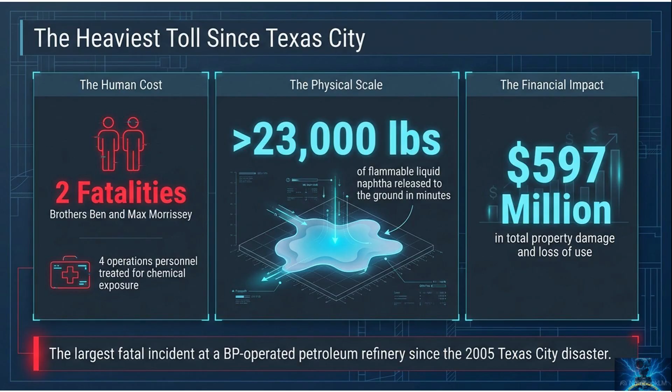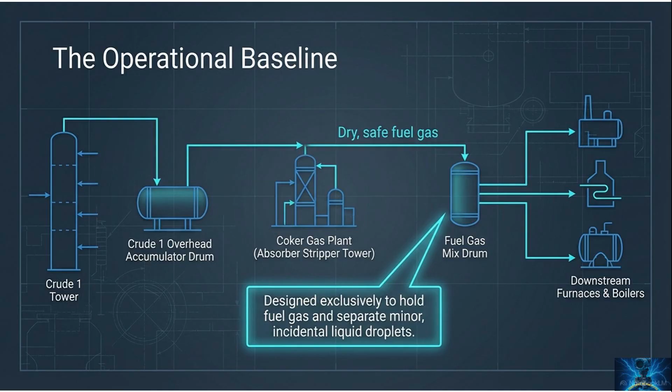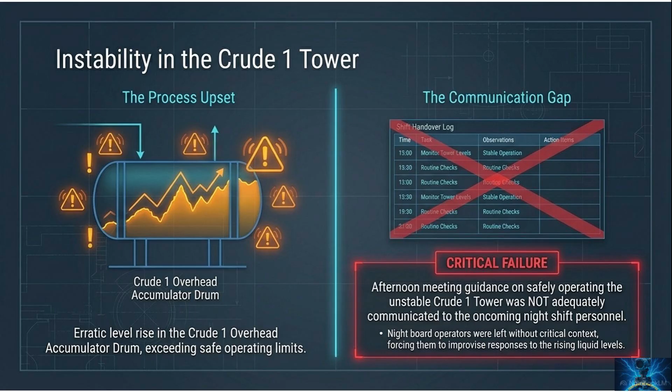The path toward disaster really began with instability in the Crude 1 tower. Earlier problems had already left operations in an abnormal state, and the night shift inherited a unit that was not truly stable. At the same time, critical operating context was not fully communicated during handover. So the incoming operators were trying to manage rising liquid levels and shifting process conditions without the full picture. That is a rotten setup for good decision-making.

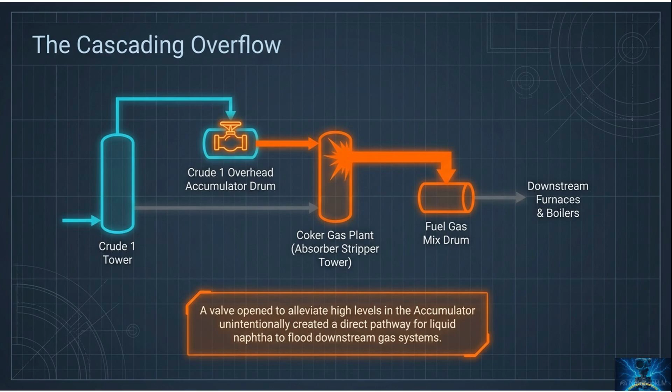Here is where the cascade becomes physical. To relieve high level in the Crude 1 overhead accumulator drum, a valve was opened to send naphtha toward the coker gas plant. But with the coker gas plant in a vulnerable configuration, that action created a direct pathway for liquid naphtha to move where only vapor service was expected. What looked like a local corrective move upstream became the start of a refinery-wide overflow problem downstream.

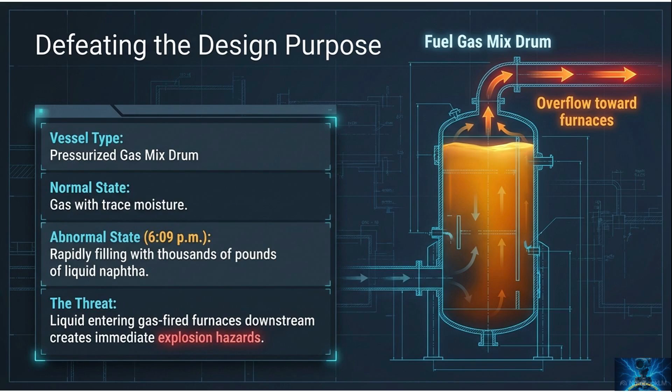About 6:09 p.m., the fuel gas mix drum was no longer acting like a gas separator. It was rapidly filling with liquid naphtha. That completely defeated its design purpose. A gas mix drum can tolerate trace moisture. It cannot safely handle thousands of pounds of flammable liquid pouring into a fuel gas system. Once that happened, the threat changed from a process upset to an immediate ignition hazard involving furnaces and boilers across the unit.

Now pile that on top of an alarm flood. The board operators were not dealing with a clean, manageable panel. They were being hammered by alarms for nearly 12 hours. More than 3,700 alarms were recorded that day. That is not more awareness. That is cognitive overload. When alarms come faster than a human can interpret and prioritize them, the control room stops being a decision center and starts becoming a noise machine.

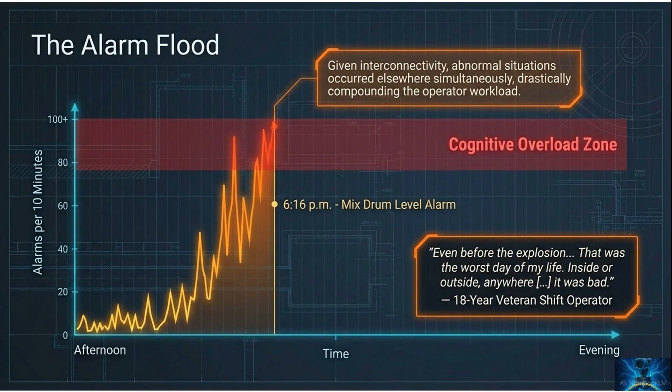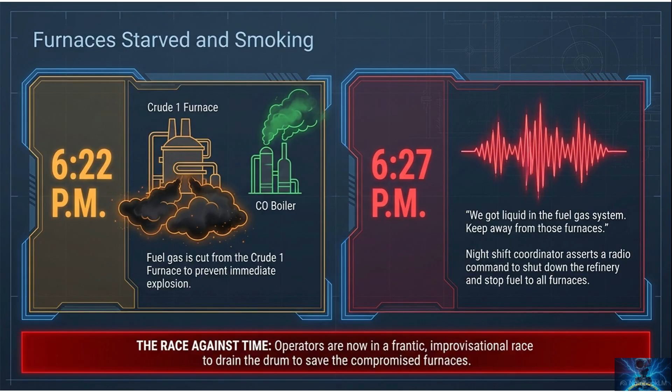The system itself started broadcasting distress signals. Furnaces and boilers began smoking because liquid naphtha was reaching equipment that should have been burning clean fuel gas. The Crude 1 furnace showed black smoke first, then a boiler emitted green smoke, and the warning was unmistakable. Liquid was in the fuel gas system. By 6:27 p.m., the refinery coordinator called for shutdown actions. But by then, the excess liquid had already moved too far downstream.

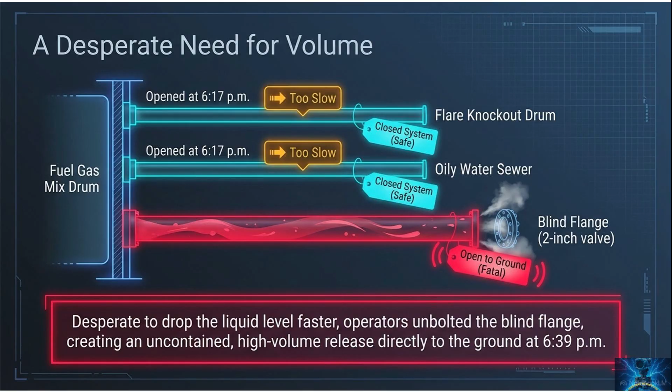At this point, operators needed volume. They opened the drain to the flare knockout drum and the drain to the oily water sewer. But those paths were too slow to keep up with what was entering the mix drum. Under intense pressure, they escalated to a far more dangerous workaround, removing the blind flange and releasing material directly to the ground. That was not a controlled process solution. It was an emergency improvisation inside a failing system.

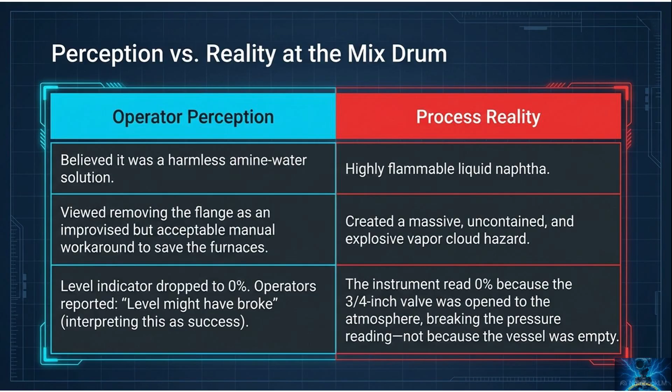The instrument said the drum was emptying, when in reality it was still full and still feeding the hazard. By the mid-6:30s, the situation had crossed into an uncontained release. Operators in SCBA gear were using water hoses to try to direct the draining liquid toward a sewer, still not fully recognizing the real chemical danger.

The visible liquid was only part of the problem. The invisible problem was the vapor cloud forming above and around it. Once flammable naphtha is released hot and fast into open air, the cloud becomes the real killer, because it can drift until it finds ignition. At 6:46 p.m., that is exactly what happened. The vapor cloud reached a likely ignition source near the crude 1 furnace and flashed.

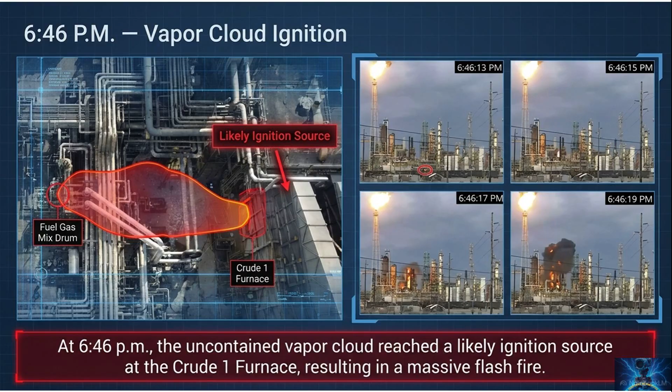This was not a pressure explosion in the Hollywood sense. It was a flash fire, which is fast, violent, and devastating enough all by itself. The key lesson here is that once you allow a flammable cloud to form in an operating refinery, you are no longer asking if there is an ignition source nearby. You are asking which one gets it first.

The response after ignition was immediate and heroic. At 6:47 p.m., an outside operator was found on fire near the base of the crude 1 tower, and a co-worker used a nearby fire monitor to extinguish the flames. At 6:49 p.m., the trainee was moved to the blast-resistant north pod for first aid. Then, at 6:56 p.m., heat exposure caused a blocked-in pipe in a nearby rack to rupture, feeding even more fuel into the growing fire. Even after ignition, the original source had not yet been isolated.

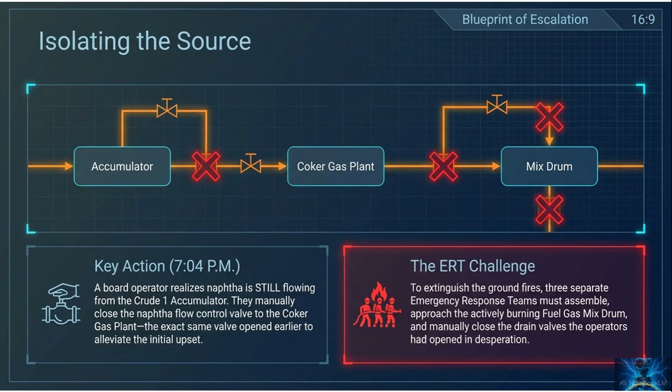At 7:04 p.m., a board operator finally recognized that naphtha was still flowing from the crude 1 accumulator through the coker gas plant toward the mix drum. He manually closed the same control valve that had been opened earlier to relieve the initial upset. Meanwhile, emergency response teams had to physically approach the burning area and close the drain points one by one. That is a brutal way to recover control.

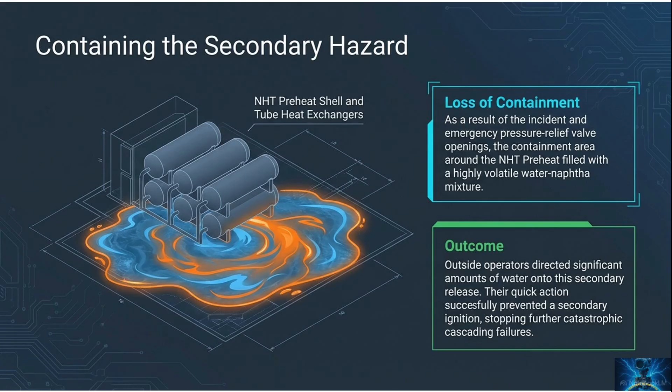There was also a serious secondary hazard developing around the naphtha hydrotreater preheat exchangers. Loss of containment and relief events created a volatile water and naphtha mixture in the containment area. This could easily have become another ignition and another cascade on top of the first one. The reason it did not is because outside operators got a large amount of water on it quickly and kept that secondary hazard from finding a flame front.

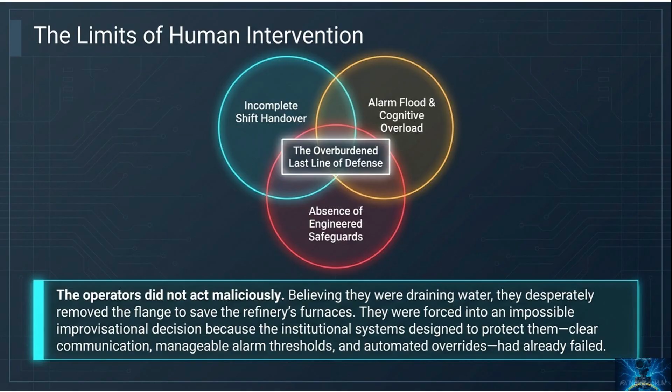This is why blaming operator error is too shallow. The operators did not act maliciously, and they were not casually reckless. They were pushed into an impossible corner by poor handover, alarm overload, missing engineered safeguards, and bad process information. Human intervention became the last line of defense only after the real defenses had already failed. That is exactly why modern process safety says you do not design around perfect humans. You design around predictable human limits.

The CSB broke this disaster into 5 root causes. First, safeguard failure. Too much reliance on people instead of engineered overfill prevention. Second, stop work authority failure. Operations were not brought to a safe state soon enough. Third, weak abnormal situation management. The refinery lacked solid ways to guide people through cascading upsets. Fourth, alarm flood. Operators were buried in noise. And fifth, failure to learn. Earlier warnings and prior incidents did not produce the changes they should have.

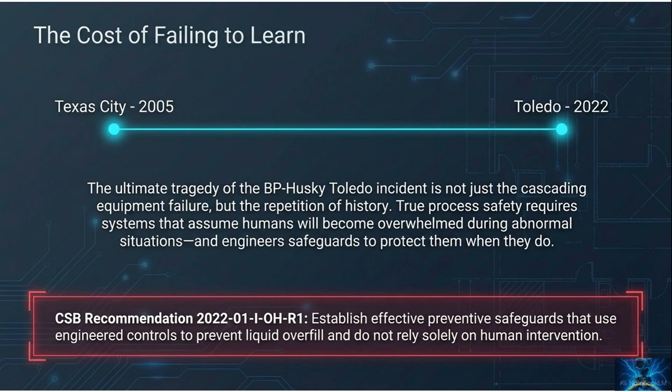The deepest indictment here is not just that Toledo failed. It is that history repeated itself. The parallels to Texas City are hard to ignore. Overflow, confusion, human workarounds, vapor release, ignition, and fatal consequences. Real process safety means assuming that during a severe upset, people can become overloaded, rushed, and wrong. So the job of engineering is not to hope humans save the day. The job is to build safeguards that protect people when the day goes bad.